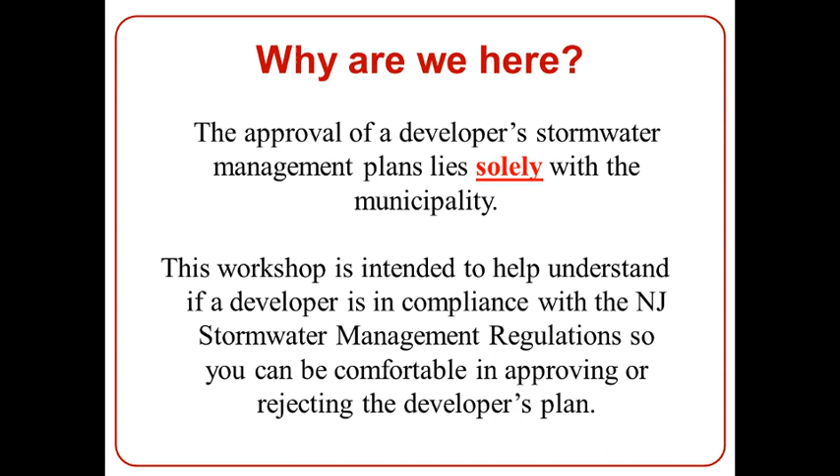Like I said, I'm with Rutgers Cooperative Extension. We've been around for about 100 years. Rutgers University is the land-grant college for the state of New Jersey. That's something that Abraham Lincoln created in the 1860s. They gave large chunks of land to universities across the country so they could better teach agricultural and mechanical arts. Rutgers competed against Princeton, and not only did we beat them in the first football game, we beat them out on this too and became the land-grant university.

About 20 years later, we realized that we did not know how to be better farmers, so we started the Agriculture Experiment Station so we can do research on how to be better farmers. And then around 1914, we realized most farmers don't go to college, they farm. So we formed the Cooperative Extension Service. The idea is to extend the knowledge university out to the people of the state.

We have an office in every county, and the idea is that you can go to the county office. If you were the farmer and had a bug on your potato, you can go to the county office, and that county agent would explain to you how to deal with that. If they didn't know, then they would come to the university, and we would do research and figure out how to deal with the problem. Now, over the years, we stopped growing corn and started growing houses, so now we're more of an urban suburban as well as agricultural cooperative extension service. So we serve all of New Jersey, not just the farmers.

I came to Rutgers about 17 years ago, and I started the Water Resources Program. Our mission is to identify and address community water resources issues using sustainable and practical science-based solutions. As you know, every mission statement must have as many buzzwords as possible in it, and that has them all.

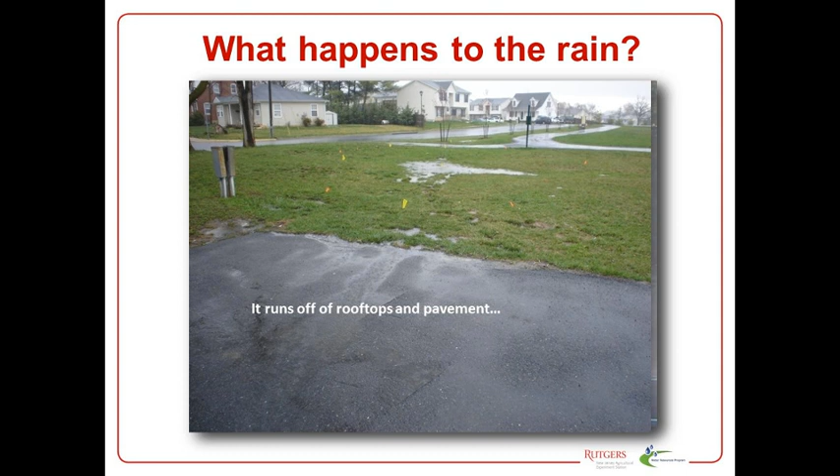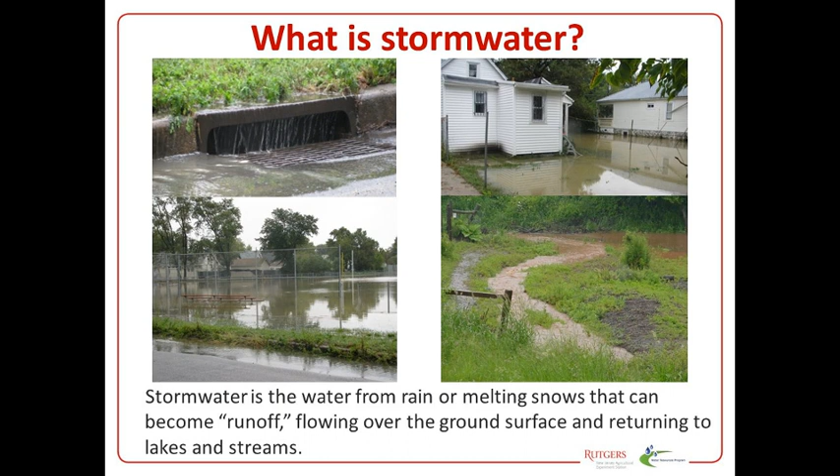Okay, so stormwater runoff, basically water from the rain or melting snow. So this is kind of what we're talking about here. That little stream on the lower right-hand corner is a little tributary by my house in Hillsborough. It's usually a little trickle of water, unless we get a little bit of rain, and then it becomes this muddy mess carrying water out to the Royce Brook. So these are things we're trying to avoid.

We talk a lot about the hydrologic cycle, the water cycle. Our kids learn this in 4th grade, about how water is cycled through this cycle. We can't create or destroy water, it's just there, transforming how it appears in our environment. We explain often to the kids that the water they're drinking is the same water the dinosaurs peed in millions of years ago, and kids tend to get a kick out of that.

But we've changed this water cycle. We've added lots of development. Under a natural, wooded, forested condition, we get about 10% stormwater runoff. As we add single-family homes, 1-2 acre lots, we get about 20% runoff. As we add more dense development, quarter-acre, half-acre lots, we get 30% stormwater runoff. And then when we get downtown New Brunswick or some of our bigger cities, we get about 55% runoff.

New Jersey gets on average about 44, 45 inches of rain a year. The climate is changing, that's real, it's not a myth. And that number is expected to go up to 48 to maybe 50 inches a year as climate continues to change. So we will get more water in New Jersey.

So as we add more impervious surfaces, we get more stormwater runoff. An impervious surface is any surface that water won't pass through: roof of a building, a roadway, parking lot, sidewalks, even the very compacted lawns that we see in some of the retirement communities along the Jersey Shore. Although it looks like grass, it's so compacted water can't get through there, so they effectively become impervious surfaces.

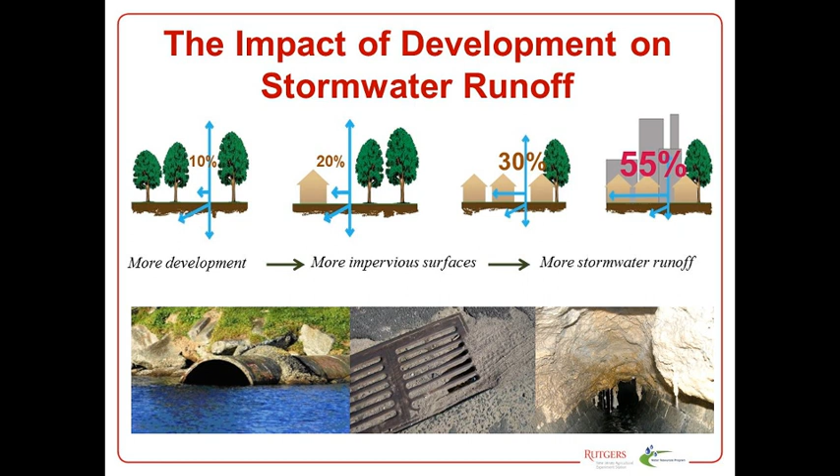So this becomes things that we really worry about. Impervious surfaces provide areas for pollutants to accumulate. When it rains, it carries this pollution off.

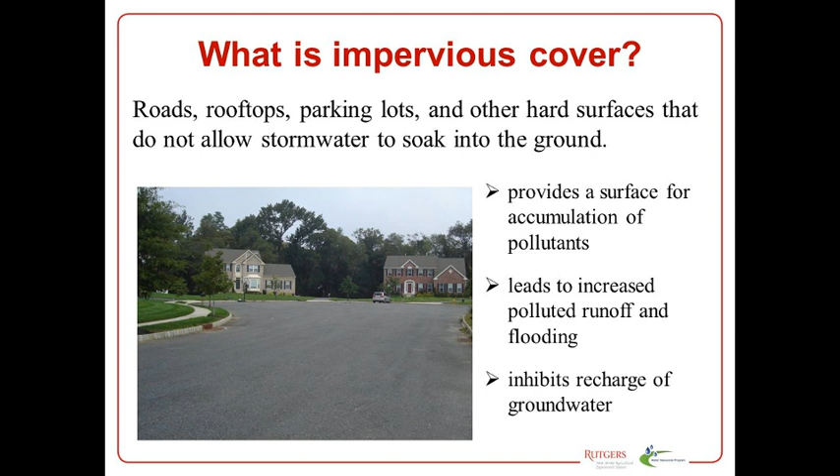Also, very importantly, it inhibits groundwater recharge. About 50% of the water we use in this state comes from the ground, so we're trying to get water back in the ground. If we don't, we don't have water to irrigate our crops, we don't have water to drink, and we don't have water to feed our streams in the summer months when it gets hot and we don't get a lot of rain. So that's very important to think about.

As we change our landscape, we add more impervious cover. So these are some of the things we see: more stormwater runoff volumes, higher peak flows, a lot more non-point source pollution, which is pollution that runs off the land, and less groundwater recharge. These are things we're trying to avoid.

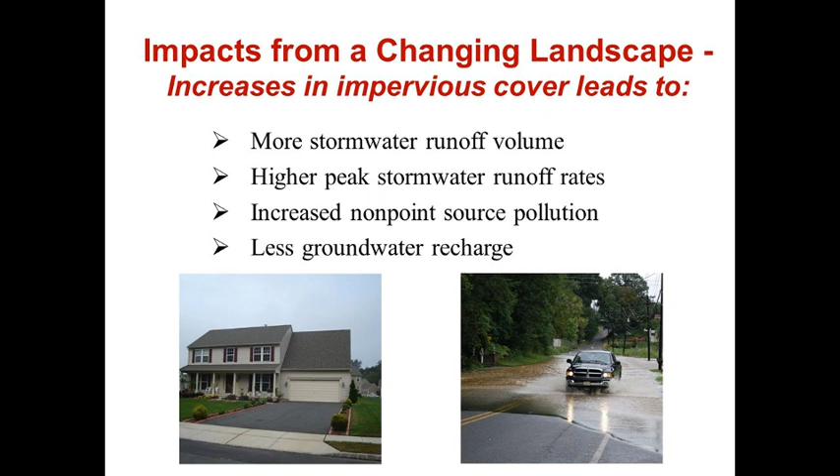By adding those impervious surfaces, we've created a new water cycle, an urban water cycle. We get much less infiltration and much more stormwater runoff. Now we're trying to figure out through stormwater management how we can reduce that runoff and get more infiltration into the ground. That's a lot of what our stormwater regulations are written about.

The current regulations were passed in 2004. There are new regulations expected to come out after the new year. They have the same requirements; the only difference is how we're going to manage stormwater. They're going to require more green infrastructure to be used to manage stormwater. So things aren't going to change all that much except for the practices put in place to manage the stormwater runoff.

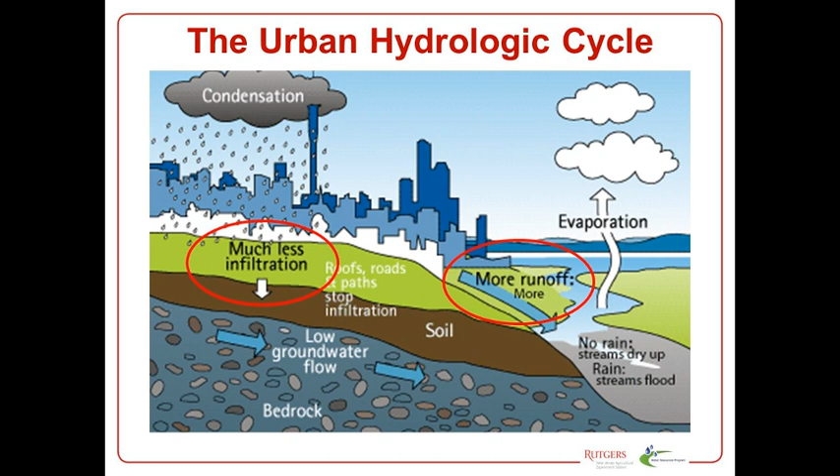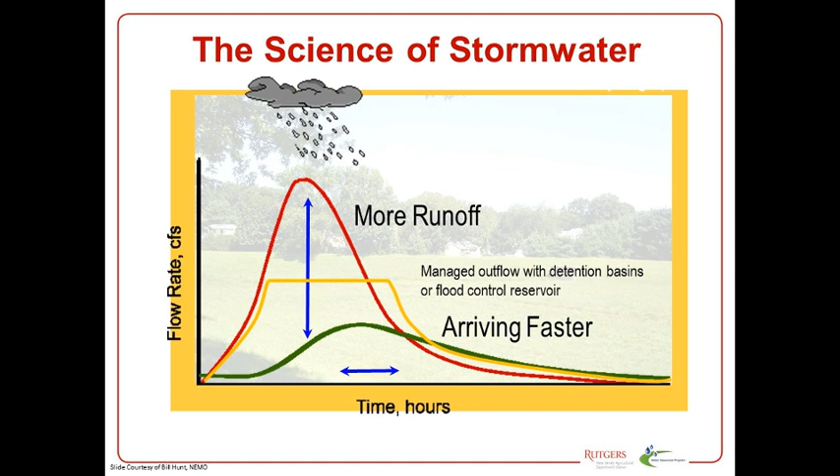Okay, so I think we're okay, right? So, history of stormwater management—this is my favorite part of this talk.

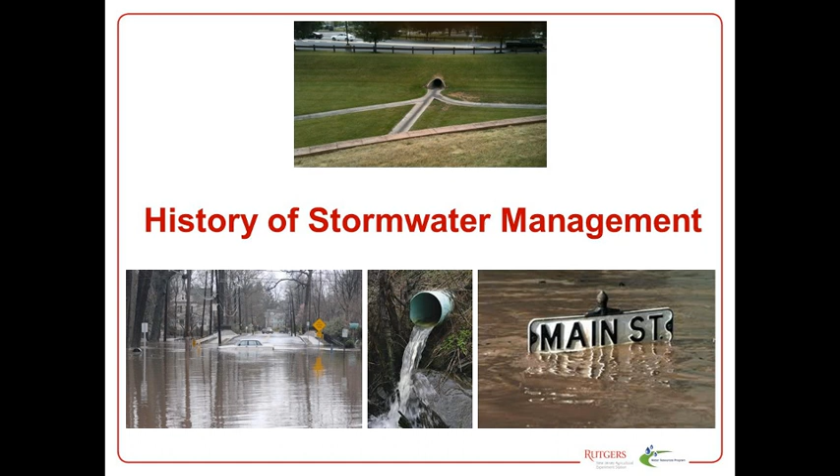The bottom right photo, Main Street, that's Manville, New Jersey, during one of the nor'easters that we have. That sign is really about 9 feet high—people kid me that it's 2 feet off the ground, but it's really not. The bridge on the left side is constantly flooded. It doesn't take much water to flood those bridges out—2 or 3 inches of rain and you see cars floating away. It's not unusual in New Jersey, okay?

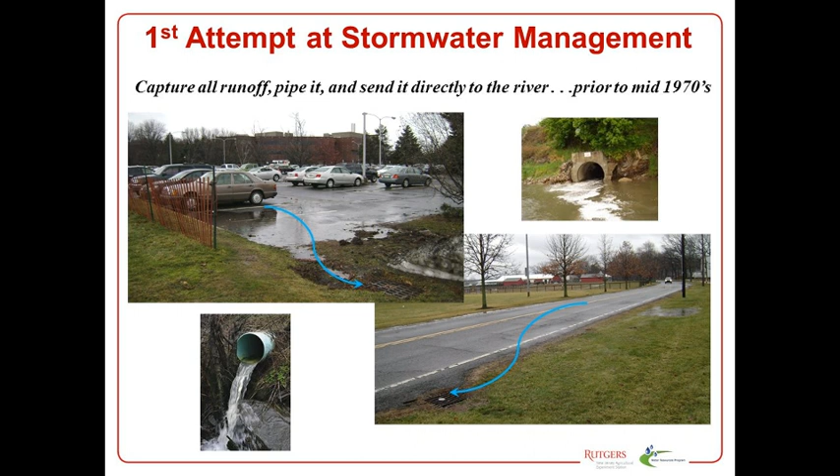So the first attempt at stormwater management was to grab the water and throw it in the catch basin and pipe it into the river directly. There's no storage, no holding it back—let's hurry it downstream and let the next town downstream worry about it. So if you're in Hillsborough or Montgomery Township in Somerset County, we let Manville worry about it, or Bound Brook. This was the original concept: hurry up and get it away, taking into no account what our downstream neighbor might be experiencing because of our stormwater runoff and how we manage it. So that's part of the issue.

The second iteration, we decided to create these big, beautiful detention basins. The idea with the detention basin was to grab all the stormwater runoff, hold it, and let it out slowly. So we took a 50-acre farm or 50-acre woodland and put houses on it with lots of pavement and rooftops. We increased the amount of stormwater running off that area, and then put it in the basin and let it out slowly. The basin does not infiltrate stormwater—most of these basins are very compacted, so very little water gets infiltrated. It just holds the water and lets it out slowly to prevent that peak from flooding downstream.

Most of these basins are designed for the 100-year storm, which is about 8 inches of rain over 24 hours. The 100-year storm does not come once every 100 years—the chance of getting it this year is 1 in 100. It's more of a probability thing. This is why we get the 100-year storm every few years, because we're just a very unlucky state, I guess.

The idea with these basins was to hold the water and let it out slowly. Somebody started worrying about mosquitoes, and they said if we have standing water for more than 72 hours, mosquitoes breed and we'll have serious health effects.

So somebody decided we're going to put in concrete low flow channels. The bottom of this basin is graded at about 0.5%. It's very hard to grade soil at 0.5%, but New Jersey is the concrete king of the world, and we can pour concrete at 0.5% all day long. So we pour these little concrete low flow channels in there.

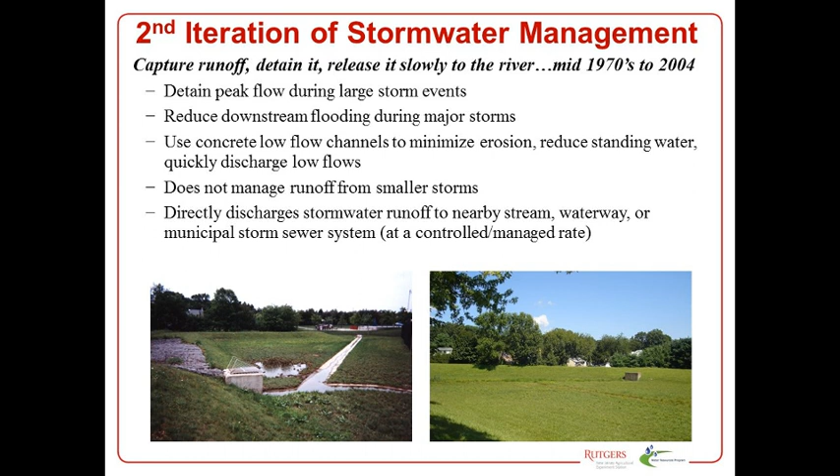So these became a big issue in New Jersey, and a lot of towns are trying to get rid of these right now. So the third iteration came out in 2004.

Regulations came out - two sets of regulations. There was a stormwater permitting regulation and a stormwater management regulation. The stormwater permitting regulations are often referred to as the Phase 2 regulations, or also the MS4 permit. The 4 S's: M stands for municipal, separate storm sewer system. That's the 4 S's.

So the idea is that every town in New Jersey, all 565 towns, have a permit for their stormwater system - the piping in the road, the ditches on the side of the road, anything that moves stormwater around their town. These are the permits that require you to do street sweeping, clean out your catch basins, adopt a pet waste ordinance, and adopt a don't-feed-wildlife ordinance.

The other thing that was passed was stormwater management regulations. The idea was that we were required to manage stormwater from any major development. Major development was defined as any development that disturbs more than 1 acre or adds a quarter acre of impervious cover. The idea was to reduce flood damage, reduce soil erosion, and protect the public.

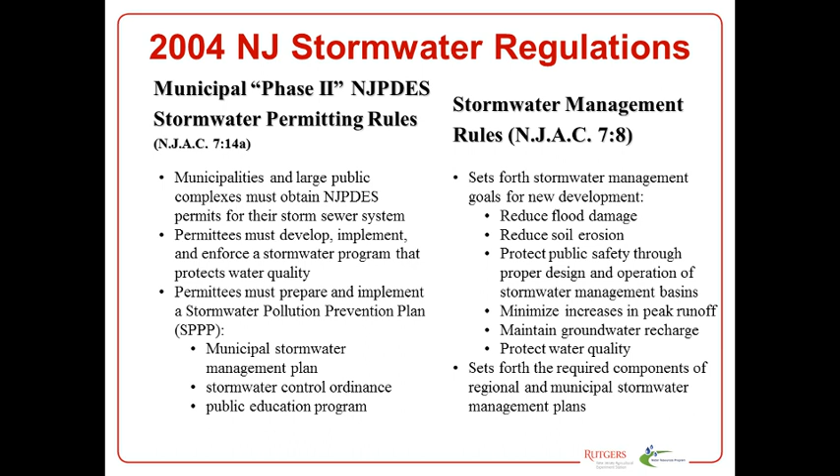It's still disturbing 1 acre or adding a quarter acre of impervious cover. You're still required to do all the things required in the earlier regulations. The 2020 regulations just ask you to do it a little differently, mainly with green infrastructure, and we'll talk more about that in a minute or two.

So the third generation, this is the one that came out in 2004. Not only are you required to manage these peak flows, but you're required to maintain groundwater recharge and reduce pollution to our local waterways. The idea was you're required to maintain 100% of your annual average groundwater recharge.

So if you had a 50-acre piece of wooded land that was recharging 1 million gallons of stormwater a year, after you put up all your townhouses, it needs to still be recharging 1 million gallons of stormwater a year. It also requires you to remove 80% of the sediment, the total suspended solids - any runoff off the property has to be filtered so no sediment leaves the property. So those were the two additions to regulation.

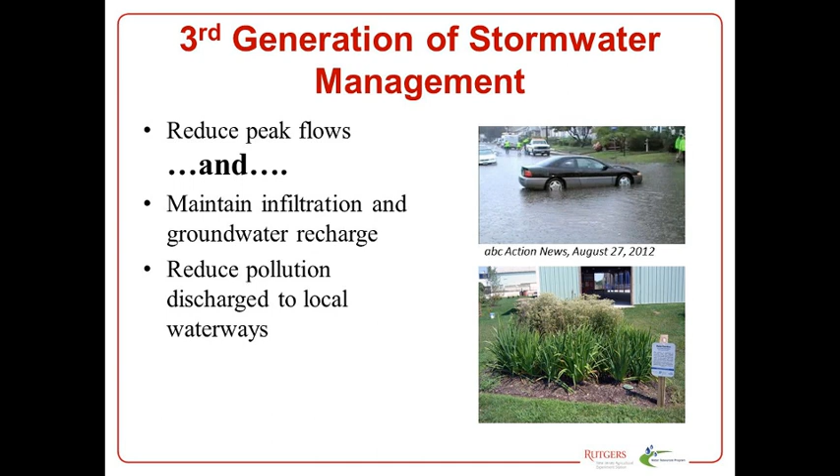So not only dealing with water quantity, but dealing with water quality and groundwater recharge. So how do we do that? Well, we have a video here that kind of shows that - this is a video from the American Society of Landscape Architects. Hopefully I'll be able to get it to work. Let's see how this works here.

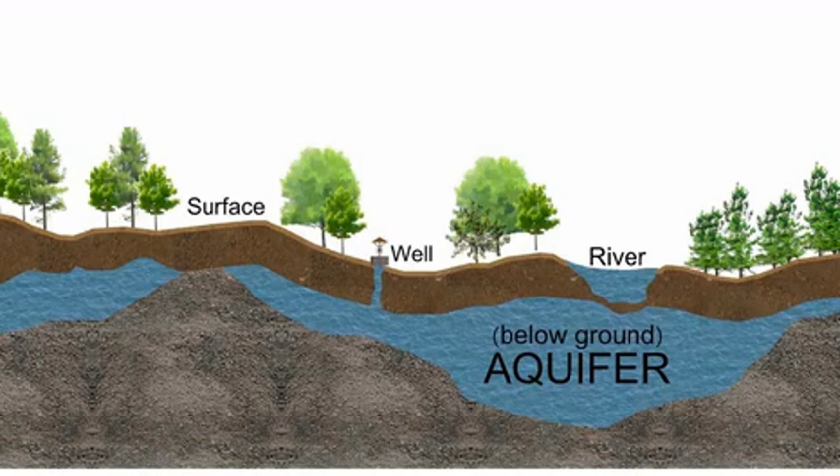Landscape architects design ways to divert and collect rainwater to prevent damage and replenish the aquifer, a below-ground natural reservoir of water used for drinking, cooking, bathing, and irrigation. This animation demonstrates how rainwater is managed on a university campus plaza.

The plaza surface is composed of standard materials. Concrete defines the walks and steps, and sod and lawn make up the open space. The building's roof, which also collects and discharges water, is a plain solid surface. Storm sewer and drains are ready to catch and pipe water away from the site and prevent flooding.

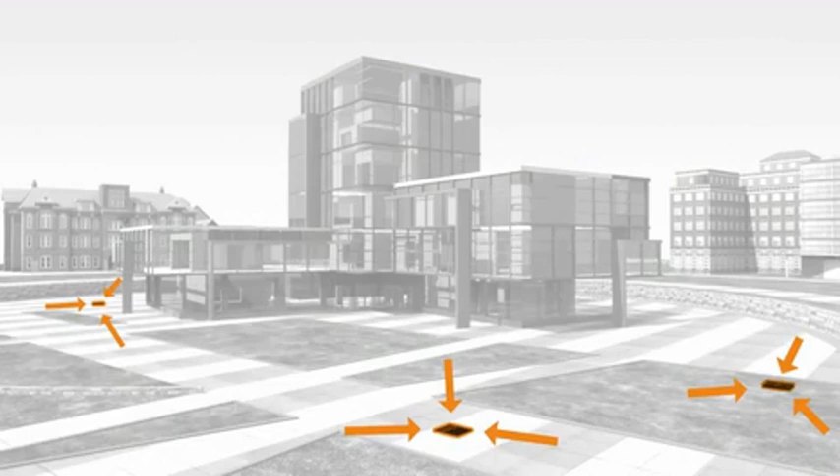During heavy rainfall, these materials, like concrete and sod, can only absorb so much water. The excess rainwater on the surface is funneled into the storm sewers. The building's roof diverts most of its water down pipes into storm drains as well. All this excess water, called runoff, can overtax and cause the storm drains to back up.

This causes water to collect in ever-expanding pools. Too much runoff due to heavy rains can cause damage and sometimes catastrophic floods. It also results in more polluted, untreated water entering the aquifer.

There are more effective means to manage stormwater using sustainable systems and materials that prevent flooding and replenish the aquifer. The first system is a green roof placed on top of a building. It is layered with drainage materials, compost or planting soils, and vegetation, and can absorb some of the rainfall, reducing the amount of water flowing into the storm drains.

Another system involves porous pavement. Concrete surfaces are replaced with individual concrete bricks called pavers. Each paver is interlocked with its neighbor and separated by permeable material, composed of small crushed rocks, also called aggregates.

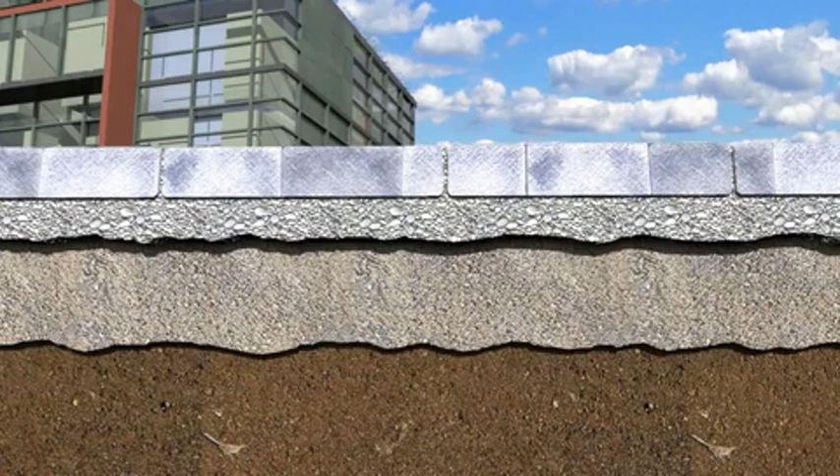Zooming into the cross-section, we see the permeable aggregates between and below the pavers. This aggregate-filled space acts as a sponge, absorbing water downward, diverting a good amount of runoff from the storm drains. The diverted water will eventually make its way into the aquifer below ground.

The third system is called bioretention, also known as a rain garden. A rain garden is a swale or channel that absorbs, holds, and slowly releases excess water. Its section is composed of compacted soils defining the depth, width, and slope of the swale, sand and drainage materials, plant soils, and vegetation native to the region. Rain gardens are not only aesthetically pleasing, they also restore wildlife habitat.

Now when it rains, water does not collect into large pools. Instead, our three systems absorb and redirect the excess runoff. The green roof prevents a lot of water from entering the storm system or hitting the ground. The porous concrete pavers absorb some of the rainwater and direct it downward into the aquifer. And the rain garden accumulates the remainder of the rainwater, preventing flooding and damage.

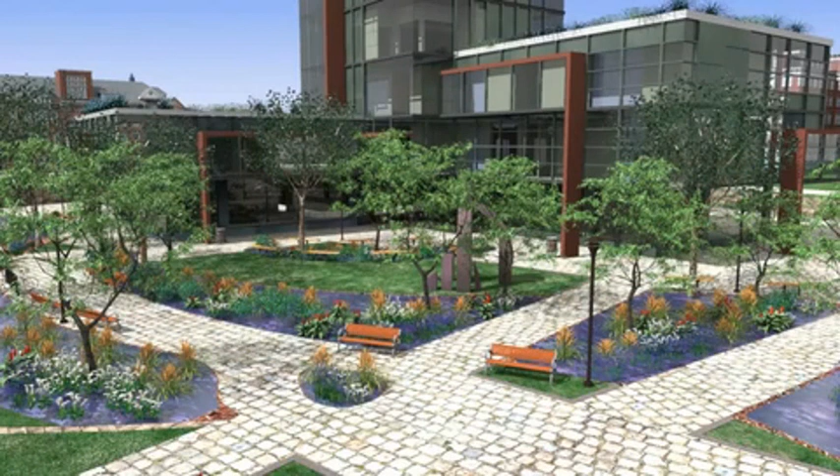As part of its function, the rain garden slowly releases rainwater into the aquifer over a 24-hour period. Just as important, the vegetation acts as a natural water purifier, absorbing pollutants and toxins from the water.

Water is in high demand and shortages are common. These three systems are able to capture and treat more water than typical stormwater mechanisms. The systems are effective, easy to implement, and contribute to a more sustainable water management practice.

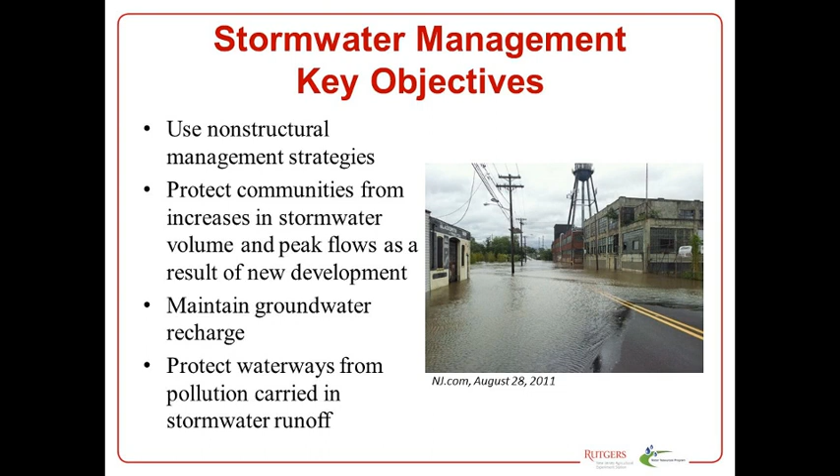So the stormwater management objectives, there were really kind of 4 objectives with this. One was using these non-structural management strategies, thinking about how to better manage the water without actually having to build too many things. Protecting communities from increases in stormwater, so this is really kind of flooding issues, maintaining groundwater recharge, and also filtering out pollution. That's really the other component of the regulations.

And none of that has changed with the 2020 requirements. This talks about major development. We discussed this earlier: disturbing 1 acre or more, or increasing impervious area by 1/4 acre. If you do that, then you have to comply with these regulations.

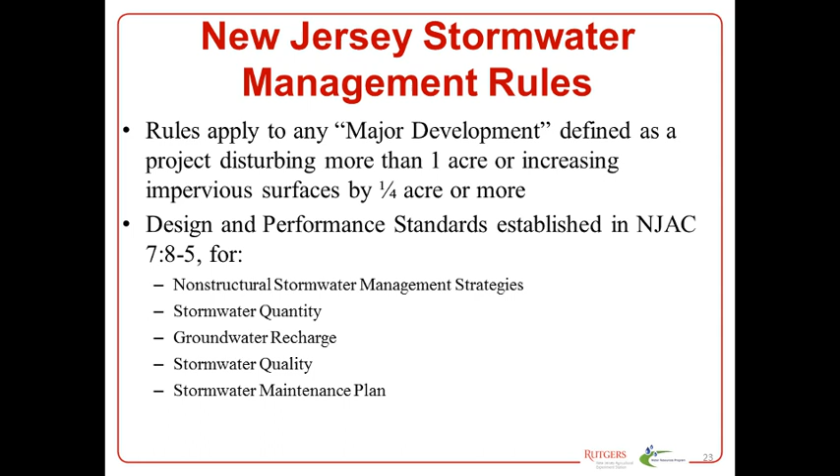And you'll notice, once again, non-structural strategies, quantity, recharge, and quality. And the other bullet here is a stormwater maintenance plan. Anything that you build to manage stormwater, you have to provide a maintenance plan for, so that whoever owns and operates that facility knows how to take care of it and make sure it's being properly maintained. We know that if things aren't maintained, they tend to stop functioning in every walk of life.

Non-structural strategies are often referred to as low-impact development principles. The idea is to collect and infiltrate stormwater near its source. This second bullet is the main focus of the 2020 regulations: how do we disperse stormwater practices throughout the development so we can collect the water and infiltrate it as close to the source of stormwater as possible? So you're talking about smaller systems that are managing smaller amounts of water.

Somebody wants to know, is there a concern in parking lots that allow infiltration that pollutants will be conveyed into the groundwater table? That is a concern at times. Typical parking lots where cars are parked, usually not too much of a problem. Even if the cars are leaking a little bit of oil, usually that's not an issue. We tend not to promote infiltration off of very dirty places, like where they keep the school buses, or where the public works department keeps their trucks - any older vehicles that might be leaking fluids, or heavy use vehicles. We do not encourage infiltration from those places. Actually, it's not allowed in the regulations to infiltrate from those places. So, for example, you're not allowed to infiltrate from a gas station. That's another aspect of it.

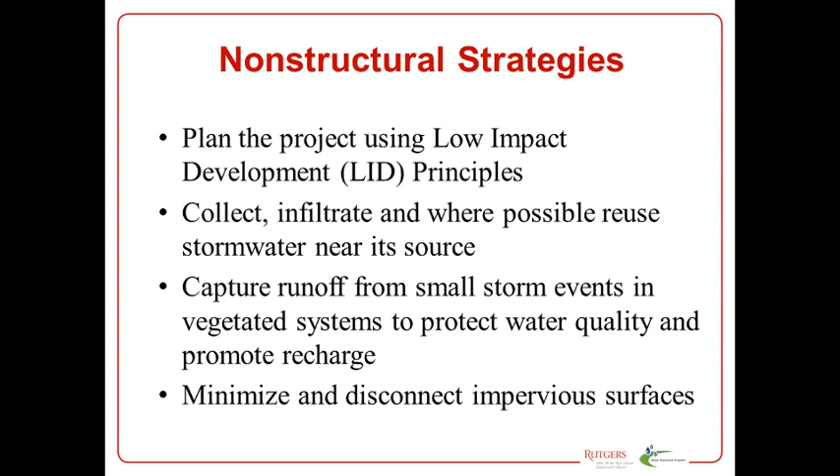Capturing runoff from small events is another issue, using vegetative practices to do that, and minimizing and disconnecting impervious surfaces. We'll talk more about disconnection - it's a very powerful tool that we don't use enough of in New Jersey.

So water quantity regulations - these have not changed. These have been the regulations since 2004. The idea is we're going to control the post-development runoff for the 2, the 10, and 100-year storm events. In other words, we calculate how much stormwater runs off before we develop. For the 2-year event, that's about 3.3 inches of rain over 24 hours. A 10-year event is about 5 inches of rain over 24 hours, and the 100-year event is about 8 inches of rain over 24 hours. That varies depending on what county you're in, so there's a range. You can see there are some numbers on the bottom about the 2, the 10, and the 100-year rainfall events. So the idea is that you measure, you calculate what's coming off the land now, and you try to reduce that after you develop.

The third bullet on this list, design BMPs. Now, BMP stands for Best Management Practice. That's something that we use all the time - we talk about these stormwater measures.

So the BMPs for the 2, 10, and 100-year storm talk about reducing the peak flow. For the 2-year storm, it's a 50% reduction. The 10-year storm is a 75% reduction of the peak. And for the 100-year storm, it's 80% of the peak. So for the 100-year storm, if 100 cubic feet per second is your peak flow off the land, after you develop, it can only be 80 cubic feet per second. So you really have to do a good job of managing this.

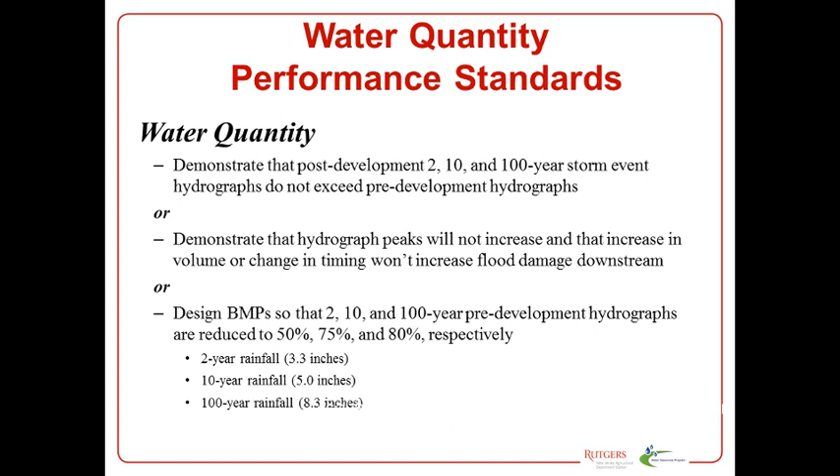There's a lot of questions about green roofs that we'll get into a little bit later as we go on.

So the groundwater standard is to maintain 100% of your average annual groundwater recharge. This is pretty simple: if you're recharging 1 million gallons of stormwater before development, afterward you need to be recharging 1 million gallons of stormwater. The second requirement talks about the 2-year storm, measuring pre-development versus post-development peak. Usually the second calculation gives you a larger volume of stormwater to recharge, so most people who do these calculations use that first requirement, maintaining 100% of their average annual groundwater recharge.

There's a question about whether the developer is held to reduce the peak flow or simply not exceed pre-development levels. No, they are required to reduce the peak flow. For the 2-year storm, the post-development peak has to be 50% of the pre-development peak. For the 10-year, it has to be 75% of the pre-development peak, and for the 100-year, it has to be 80% of the pre-development peak. So you are reducing it. You have to keep in mind, you're getting a lot more stormwater runoff after development because you're adding so much impervious cover.

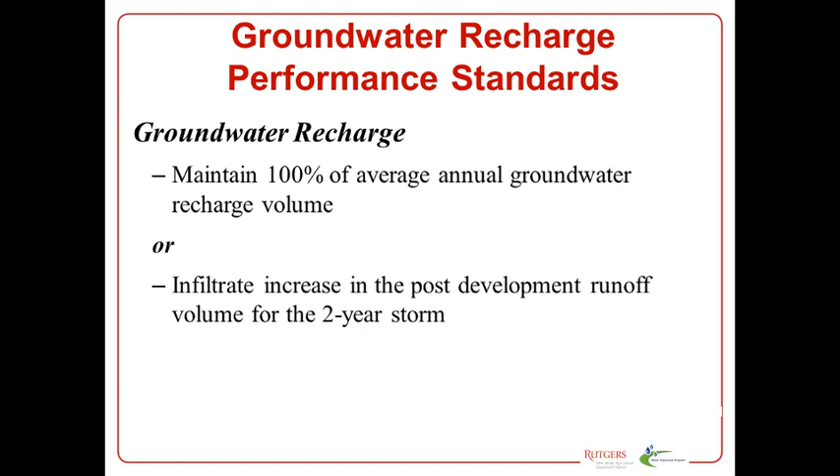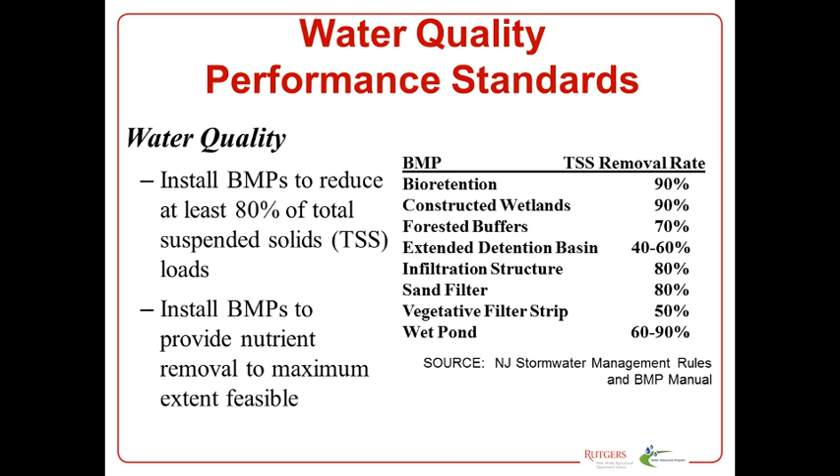A lot of people ask, what is the maximum extent feasible? Well, that depends who you are. If you're a developer, the maximum extent feasible may be a much lower number than if you're an environmentalist. So that's always been a question that we've had. That terminology comes from EPA, and it's been very difficult to get a real calculation of what that number should be.

We do have guidance for this: the Stormwater Management Manual, the BMP manual, and the Tier A Municipal Stormwater Guidance document. The Tier A is the permit for Tier A communities. There are 2 permits, MS4 permits, stormwater permits that towns have. Tier A is for the more developed towns, Tier B is for the rural towns. There are 99 Tier B towns. The rest of the 565 municipalities are Tier A municipalities that have to achieve much higher requirements of what they must do. The municipal stormwater management rules, or permitting rules, are the ones that require towns to pass a stormwater control ordinance and to manage stormwater from any new development or major development.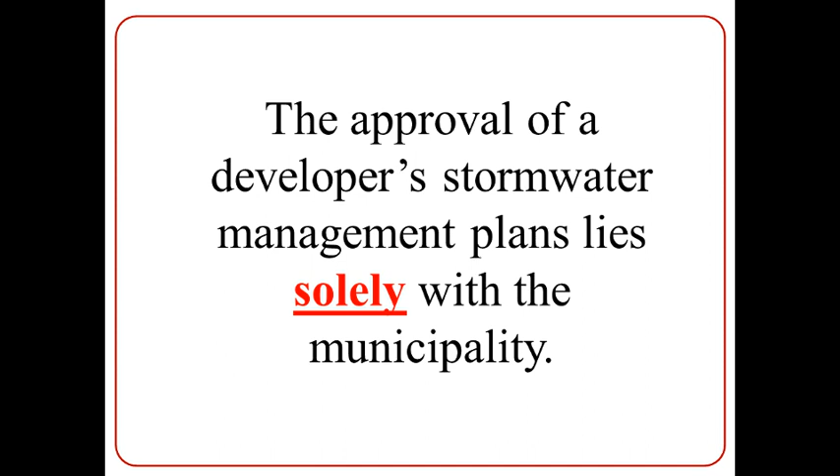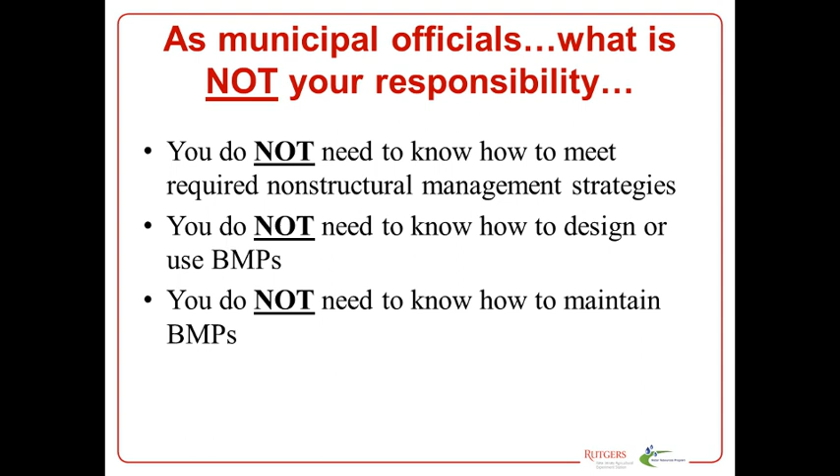So let's move on. As municipal officials, what is not your responsibility? You don't need to know how to meet the required non-structural strategies, how to design stormwater practices, or how to maintain a practice. But you do need to know that you're responsible for ensuring that all major developments are compliant with the regulations.

Originally, New Jersey DEP asked me to teach all of you how to be engineers. But most people go to college for 4 years to do that and have to practice for quite a while. It's a little silly trying to teach volunteers with a wide range of backgrounds how to be engineers. So the best we can do is teach you how to ask the right questions. That's what we're trying to accomplish here.

So if you allow development to go in and it doesn't comply with these regulations, the town is liable. We've seen this happen in one town where they let development go in, they weren't satisfying the groundwater recharge requirements, and the town had to come in and fix the system. The developer was long gone. Most developers develop a piece of property under a company name. After the property is developed, they get their bond back, dissolve the company, and start another company for the next development. So if a township approves a development that didn't comply with the regulations, it's hard to go back after the developer.

In this case, the town had to spend $250,000 to redesign the stormwater system, and a lot more money to actually reconstruct it. That was all taxpayer dollars, because they didn't make the developer follow the regulations. So the taxpayer got the burden of that, which is what we're trying to avoid.

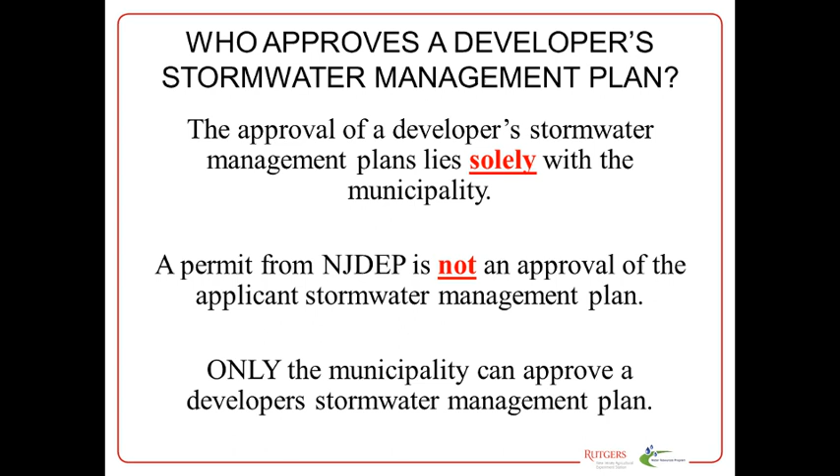You will often see an attorney come in for a developer, waving paperwork around, saying 'Look, I got my DEP permit, you don't need to look at my stormwater stuff.' That's incorrect. You still have to review their stormwater permit, their stormwater application, and their plans, and make sure it complies with the state regulations. If it doesn't, DEP won't be held liable. You as a town will be held liable.

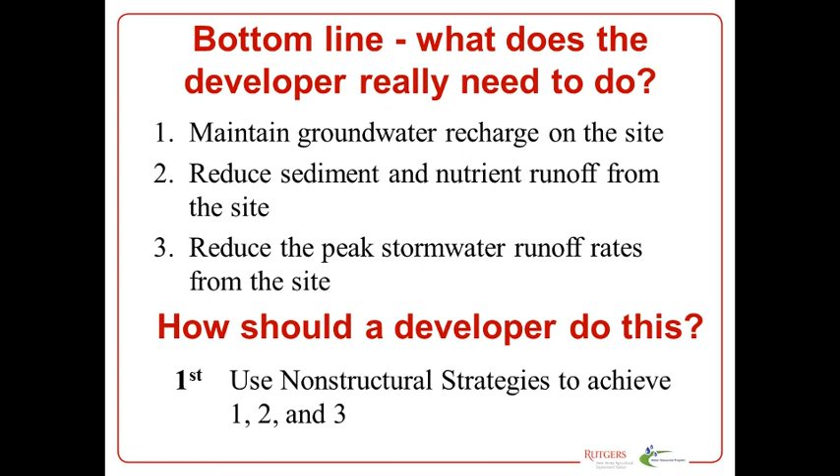So we start thinking about how to do this. The first way is to look at how a developer needs to approach this. First, we often look at maintaining our groundwater recharge, because in doing that, we can reduce our sediment or nutrient reductions and our peak flow reductions. The first step is to use non-structural strategies.

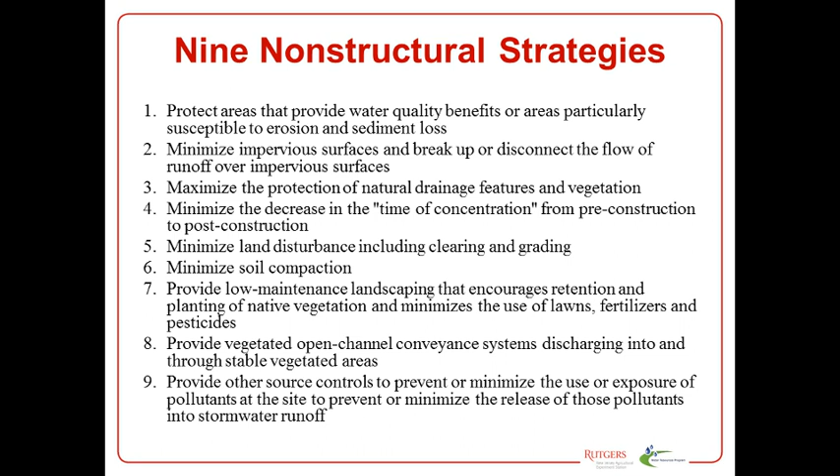This component is being replaced by the new stormwater regulations coming out in 2020. So these non-structural strategies are still in there, but the state is saying that by using green infrastructure, you're complying with these strategies, which some people agree with and others do not. But these are very straightforward things when you start thinking about them. We'll go through some of these pretty quickly so you can see what we're talking about.

We can break these 9 strategies down into 4 categories: vegetation and landscaping, maintaining or minimizing site disturbance, managing our impervious cover, and reducing or slowing down the runoff, reducing time of concentration. It's really about slowing down how quickly the water leaves your property. That's what number 4 is.

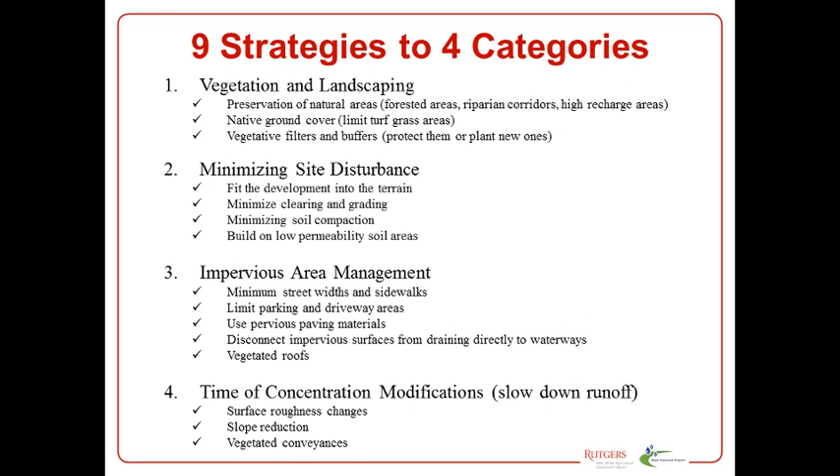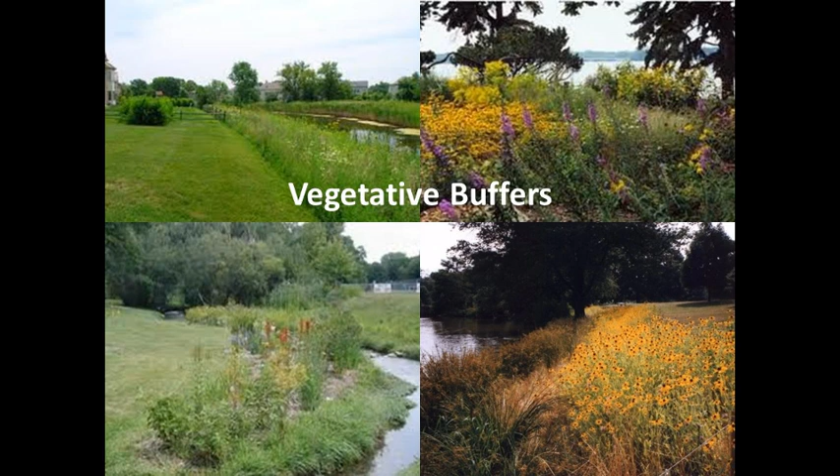So the first strategy is to protect areas that provide water quality benefits. We often see vegetative buffers around streams. We're trying to protect these areas, not disturb them, keep development out of them, which is very important. There are regulations that prevent you from developing within a certain proximity to the stream, depending on where you are in the state. Some are 300-foot buffers, some are less, but we do have required buffers around our streams.

Many of our houses have these concrete splash pans off of those downspouts, and water goes across that front lawn. That front lawn can absorb the first half-inch of rain, and that would really disconnect that rooftop from flowing directly to the stream. But in this case, you are directly connected because you're piping the water to the road, which directly goes to the catch basin.

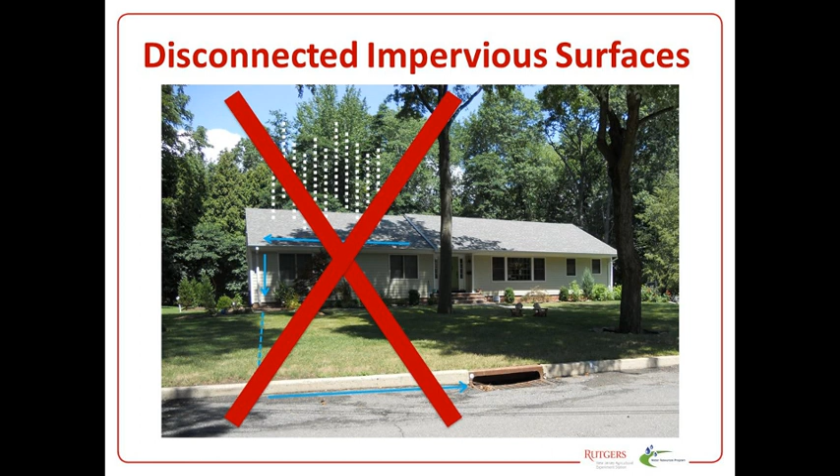One way to disconnect is to use a rain garden or bioretention system. The idea is the water can go into this landscape feature and slowly infiltrate into the ground. A rain garden is 3 to 6 inches deep with some ponding water. It can be designed to capture the first 3 to 4 inches of rain from that rooftop, whereas your lawn would only absorb maybe the first half-inch. So it's a much more robust system that does a much better job of managing stormwater.

So this is a great example from New Jersey DEP, out of the Best Management Practice Manual. We have 1 acre of pavement, 2 acres of grassed or pervious area, and we get 1.25 inches of rain. That 1.25 inches becomes very significant in the state — we call it our water quality storm. Presently, 90% of the storm events we get come in storms less than 1.25 inches.

Now, as climate continues to change, that number is going to go up. We've yet to get a number from our climate scientists — they're unwilling to say it's going to be 1.5, 1.75, but they know it's going to go up. So your 1.25 inches of rain hits the 1 acre of pavement, all runs off, goes to the road, goes to the inlet. That same rain hits the grassed area, and very little of it runs off — you get 28,500 gallons of stormwater runoff.

So as a municipality, the number one thing you're worried about is money, right? So how can we reduce this runoff by 85% for absolutely nothing, for free? You can't get any better than that unless I pay you to do it. So what if, instead of having the water run off the pavement, we have the water run onto the grass or pervious area? When it rains, water will sheet flow off of that pavement into the grass area.

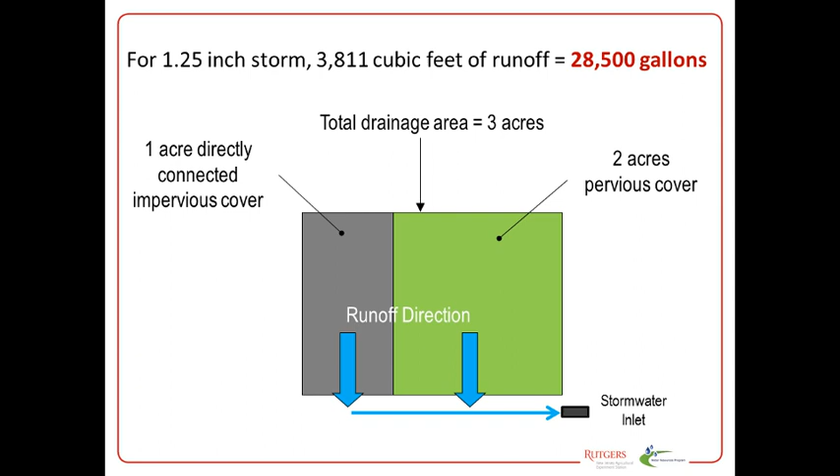So sheet flow — on a day like today, you're standing in a Walmart parking lot, watch how the water moves across the parking lot. It moves as a sheet of water about an inch thick. When that inch-thick sheet of water hits that grass, which is 2 or 3 inches high, it slows it down, it filters it out, it absorbs it, and that water has a chance to infiltrate into the ground.

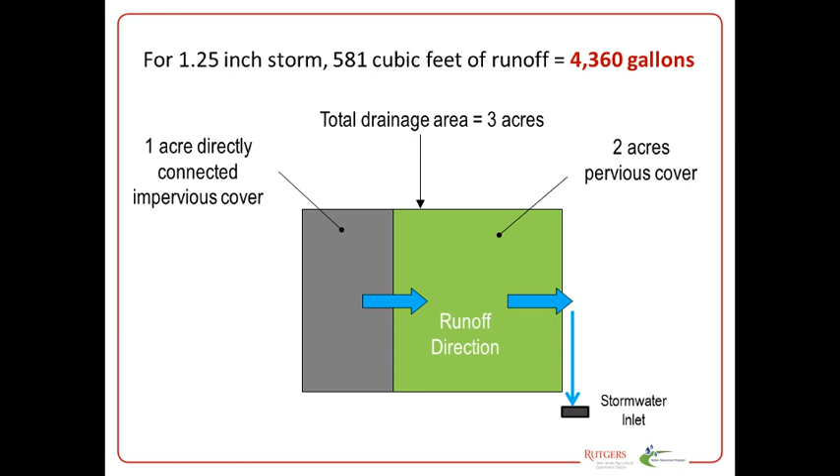So now you've gone from 28,500 gallons of stormwater runoff to 4,360 gallons. It cost you absolutely nothing — you had to pave it anyway, you just paved it a different way. You thought about it differently. You ran the water onto that pervious area, so you reduced that 1 acre parking lot to about 1/8 of an acre — an 85% reduction in runoff.

Now, if the design storm is a 10-year storm, that's 5 inches of rain, and that percent difference only drops to about 15%. That grass area cannot absorb 5 inches of rain from that parking area. But like I said before, 90% of rainfall events come in less than 1.25 inches. So 90% of the time we can make that 1 acre parking lot look like 1/8 of an acre, simply by changing how we pave it and where we send the water.

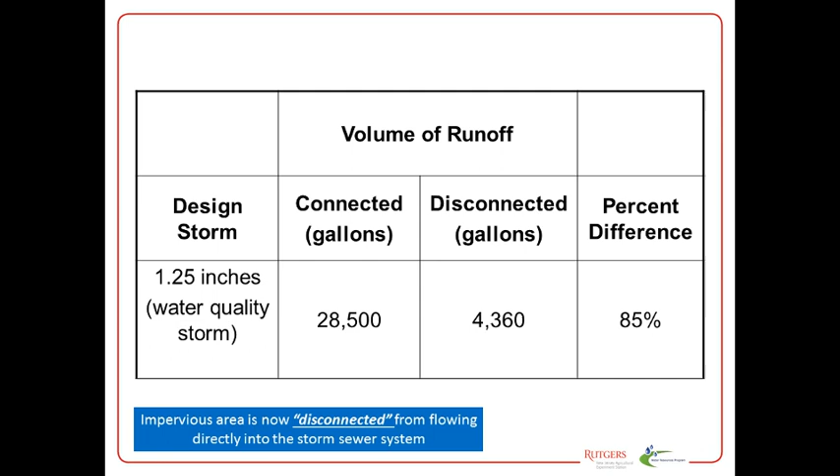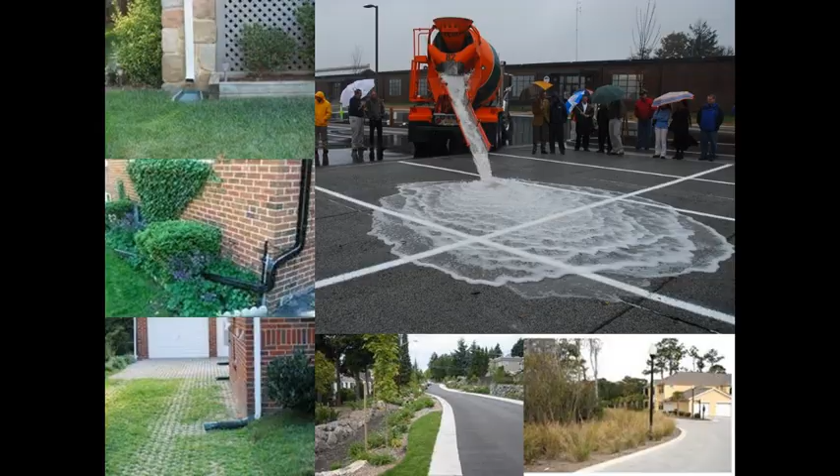In the upper left corner, this picture shows a downspout disconnection. In the next picture down, they're running the water into the vegetative area along the house. Here they're running it onto a driveway that has grass and what we call grass pavers.

In this spot, we can see this is the EPA in Edison. They have porous asphalt there, pervious concrete, and they do a lot of testing there just to show how it works. So these are ways that we can change the pavement we use and disconnect these impervious surfaces.

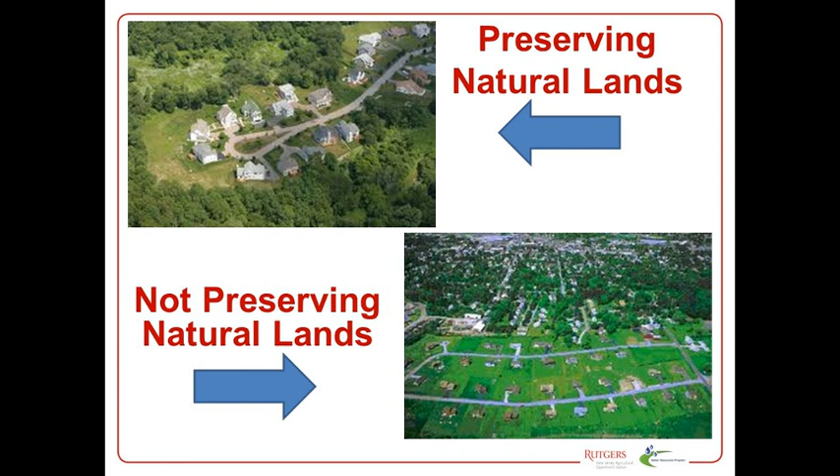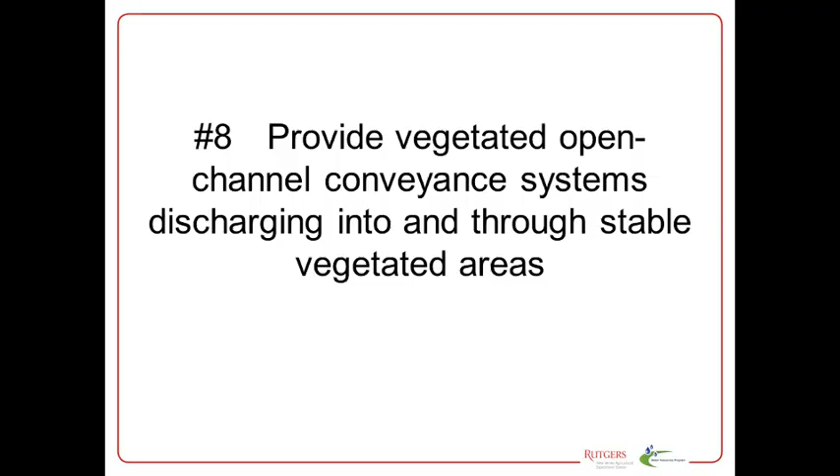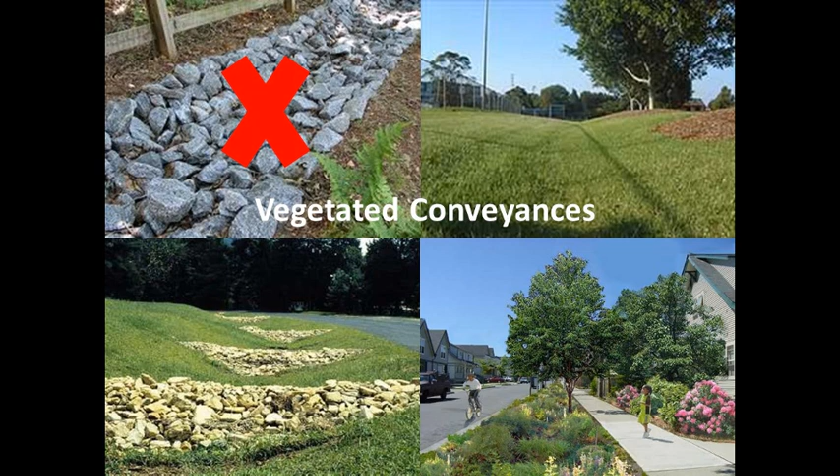Well, not really - you can put stone check dams in and the water will build up behind the dam and overflow into the next area. It's a way to slow the water down to prevent erosion. What we don't like is the upper left corner with all the riprap. It really does not help infiltration. It may stabilize that channel, but it's expensive and probably unnecessary because that's not a very steep area.

So there's a checklist you can use to see if they've actually looked at these non-structural strategies. This is something we encourage towns to make sure they use. It's contained in the Best Management Practice Manual by DEP.

So the other thing we had done was we started talking about asking the right questions. So we have in here these checklists, and these are the questions that, if you answer no to any of these, then you're really not in compliance with the regulations.

The way this was set up, and we worked on this with New Jersey DEP quite extensively, was that as you're going through these questions, if somebody says no, we're not telling them they can't develop. They have to go back and fix their development plan. We never tell people not to develop, that's not our job. Our job is to make sure they develop in an environmentally conscious way and follow the regulations.

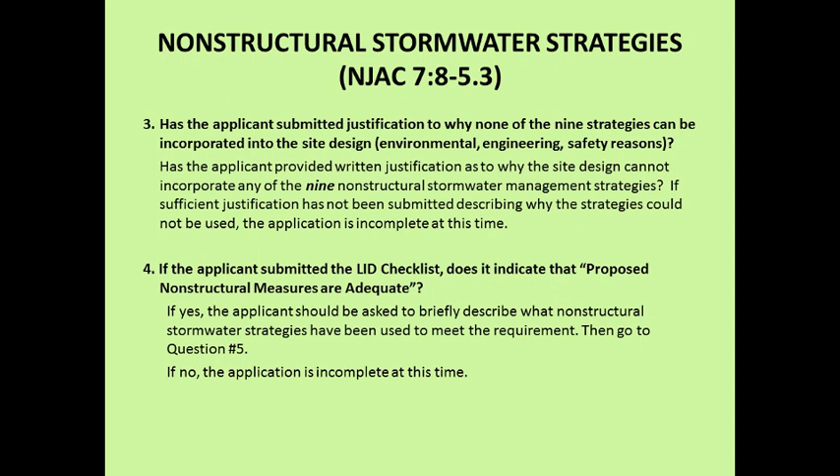So you can see some of these questions in here. A lot of it pertains to the low impact development checklist I showed you, trying to make sure that all these folks comply with these 9 non-structural strategies. A lot of times we were printing these out, giving these to towns, and towns would post these on their website or use them as part of the development package.

So in this case, what they want to make sure is that if you're saying this piece of land is set aside to manage stormwater, then you have to deed restrict it. That prevents the next property owner from coming in and eliminating that piece of land. So if you have a rain garden in front of your property and development is considering that rain garden as managing stormwater from that property, it needs to be written in the deed that that land must always stay as a rain garden.

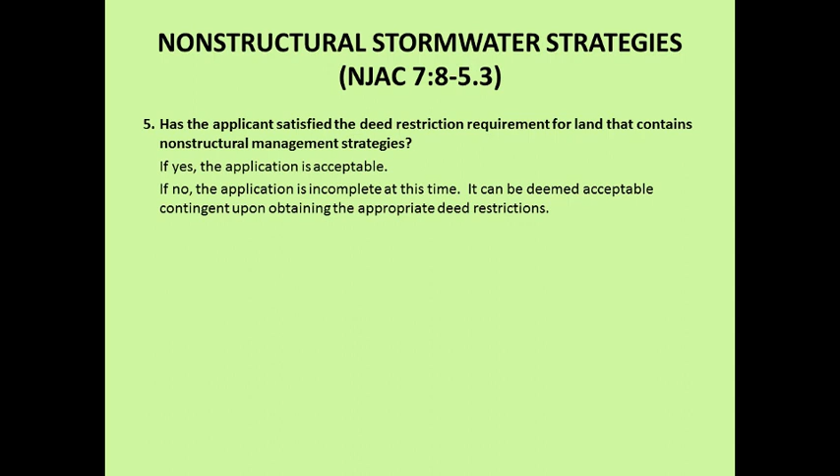And cost is not a reason for noncompliance. You didn't see that in here anywhere. The only reason to not use non-structural strategies... you can see on the bottom, the only acceptable reason for no is engineering, environmental, and/or safety reasons. Cost is not a reason. It's too expensive to do that is not a reason.

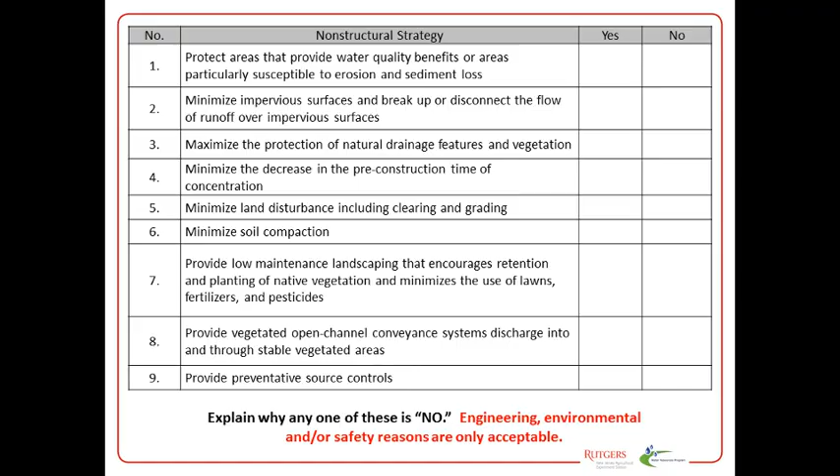So engineering - it won't work, it's too steep, we can't put a grass waterway in there, even with check dams it won't work. Environmental - it's going to cause more issues than it's going to protect. Or safety - a lot of people don't want deep ditches in their backyard where kids might be playing, so that might be a reason to pipe that area instead of putting in a grass waterway. These are things we think about, and a lot of developers say it's too expensive, and I'm sorry, but you've got to take that out of your profits. That's just the way it is, it's the regulations.

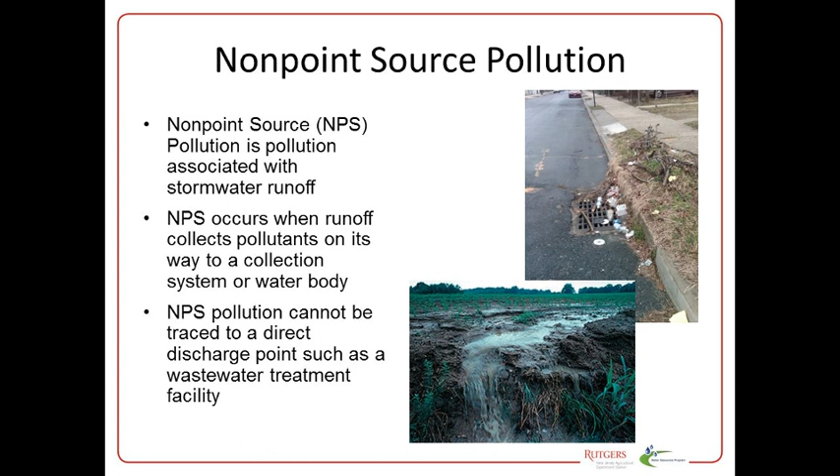So next thing we do is focus on incorporating systems to address water quality and groundwater recharge. We think about non-point source pollution that washes off the land. Nobody's running around New Jersey breaking thermometers in our lakes - the reason we have high mercury in our waterways is a lot of that settles from the atmosphere because we happen to be downwind of Ohio where they burn coal, and metals are released into the atmosphere and settle out on our rooftops and pavement, then get washed into our waterways. These are areas where pollutants accumulate, and we need to protect them.

Lots of non-point source pollution: oil and grease from cars, petroleum hydrocarbons. That's the number one reason we can't dredge a lot of our waterways, because the concentration in the sediment in the lake is so high that the dredged sediments would have to be disposed of as hazardous material, and that's very expensive. Fertilizer, we put that on our lawn to make our grass grow.

When fertilizer gets into the streams and lakes, it makes the algae grow. Algae is a plant, so during the day, when the sunlight's out, algae through photosynthesis takes in CO2 and pumps oxygen into your lake. At night, the algae respire and take in oxygen, and your oxygen starts to dip down. When the algae die, microbes come in to decompose them, and oxygen dips even further because those microbes use it during decomposition. The trick is, too, the warmer the water is, the less oxygen it holds.

So it's not unusual for you to have 2 or 3 weeks of very dry weather, wake up in the morning, look out to your lake, and see all the fish floating on the surface because the dissolved oxygen dipped below 1 part per million.

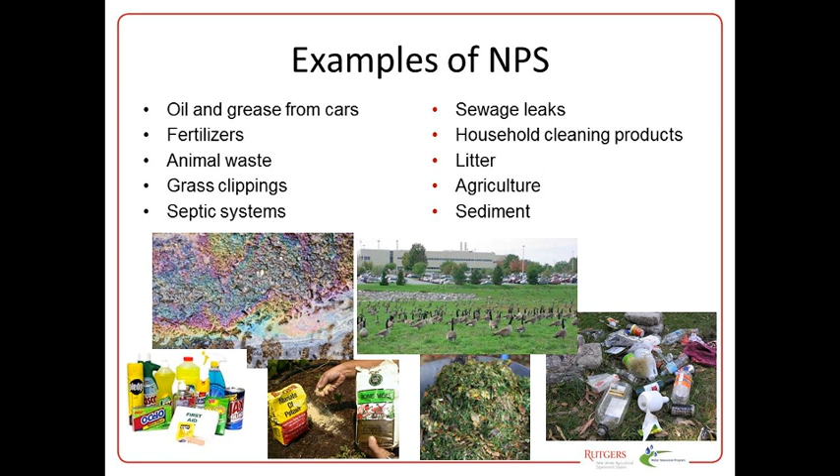Okay, so those are things we think about when considering impacts of non-point source pollution on fish and wildlife, and recreation. We can see this summer we had these harmful algal blooms.

So a lot of nutrients have gotten into these waterways, causing the algae to grow, and lakes are closed for recreation. Property values drop.

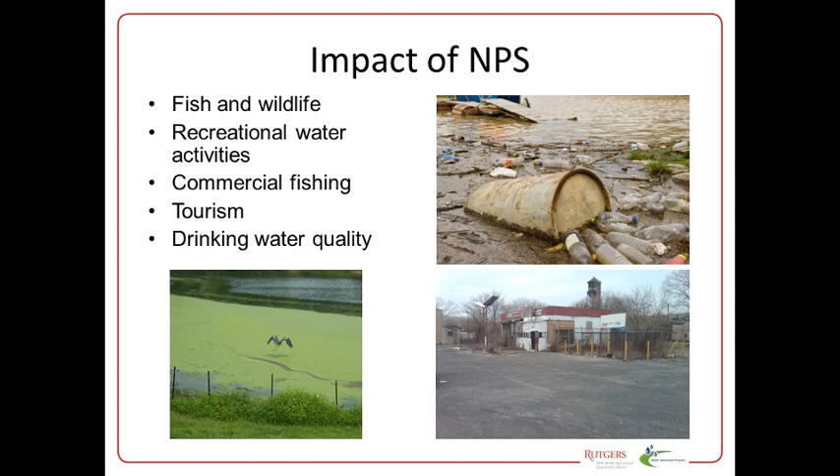Economic distress sets in where restaurants are on lakes, so we can see that happening. Years ago, when we had trash washing up on the Jersey Shore, the same thing happened, right? A lot of tourism, a lot of economic impact is associated with unclean waterways, so we have to worry about that aspect of it.

So groundwater recharge is another piece. It requires healthy soils, right? Permeability and hydraulic conductivity are really the same thing - it's how fast water moves into the ground.

Water has to infiltrate at least a half inch per hour for you to be able to put in a system designed to infiltrate stormwater into the ground. It can't infiltrate faster than 10 inches per hour, because the water moves into the ground too quickly.

There needs to be a vertical separation between the seasonal high water table, or the groundwater table, and the bottom of your infiltration system. You have to keep it away from basements, foundations, and septic systems. You don't want to be infiltrating stormwater right next to your house and having it go into your basement - that could be an issue.

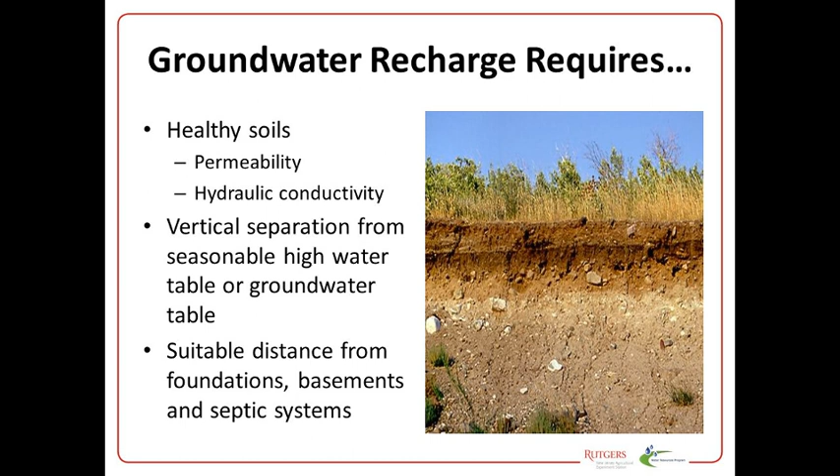So we try to keep any kind of rain garden infiltration system at least 10 feet away from a house with a foundation. Here's a little sketch of groundwater recharge - you can see it's away from the basement of the house, it's a safe distance, and it's above the seasonal high water table.

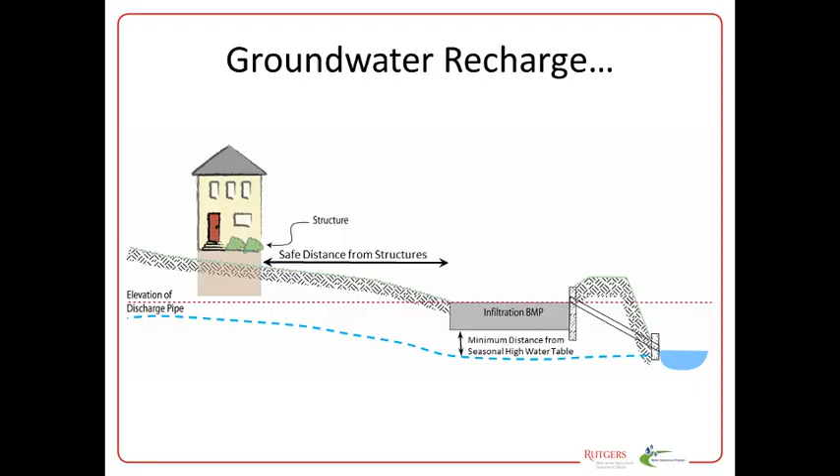So you have a minimum of 2 feet beneath the infiltration system and the water table, so the water has a place to go. If water doesn't have a place to go, that infiltration best management practice becomes a swamp, and that breeds mosquitoes and doesn't function the way it's been designed to function. So the number one system we'll see as we move forward with the 2020 regulations will be bioretention systems.

So a bioretention system - bio means life, retention means a system that holds water. They're designed to capture water and slowly infiltrate it into the ground. The vegetation helps take up some of the nutrients.

There's usually a mulch layer in there that allows microbes to decompose some of the pollutants. And as water moves into the soil, pollutants adhere to the soil and also get degraded over time. You can see the picture in the upper left-hand corner - it's one of my favorite pictures.

It's a natural bioretention system. On the left side, which is close to the road, it's got a nice mowed edge, but on the back of it, it's a natural system that kind of blends into the wooded area. The one in the upper right-hand corner is what we call a curb bump out, or a stormwater planter, where water runs along the curb and goes into this area and slowly infiltrates into the ground.

The lower left should be in every single box store we have in New Jersey where they have these traffic islands. Every one of those islands should be a bioretention system, capturing stormwater and recharging it into the ground. The lower right-hand picture is the blue house picture, which is required in every bioretention presentation.

The water runs along the curb and goes into this rain garden in front of this house. You can see it certainly adds value to the house. It's a beautiful feature. In this development in Minnesota, one of the first places to use it, they were going to put in catch basins and storm sewers, but realized if they gave everybody a rain garden, it would be a lot cheaper and also enhance the property value. That's what they did.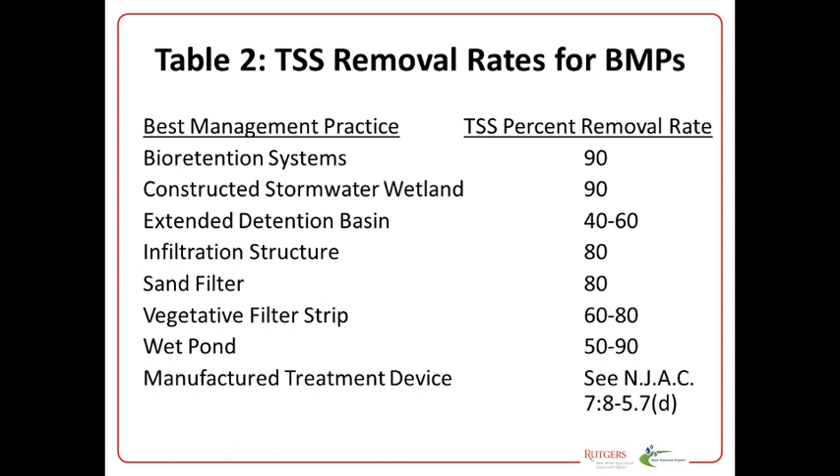The bottom one is these pre-manufactured treatment devices, which vary in removal rates, and I'll show you what some of those are. There are two types of systems.

One, on the right-hand side, is called a hydrodynamic separator, also known as the swirly device. Water comes in, swirls around, sediment settles out in the middle, and clean water comes out. Those are rated to remove about 50% of the sediment. The one on the left is a filter system, like a Brita filter on your faucet, and that'll get about 80% sediment removal.

These systems have to be approved by New Jersey DEP. There's a system called New Jersey Corporation for Advanced Technology that reviews all the data on these and certifies them, and then DEP approves that certification. So there's a website where all these devices are listed.

If somebody comes to you and says, 'I'm using the jellyfish, it gets 80% removal' - well, the jellyfish needs to be one of the systems that is on that website, approved. You cannot allow a system to go in that has not been approved by New Jersey DEP.

These systems are often sold by people very similar to used car salesmen - they review well. 'You buy my system, it's going to remove 90% of all pollution, it's going to be great.' So that becomes another thing to watch for.

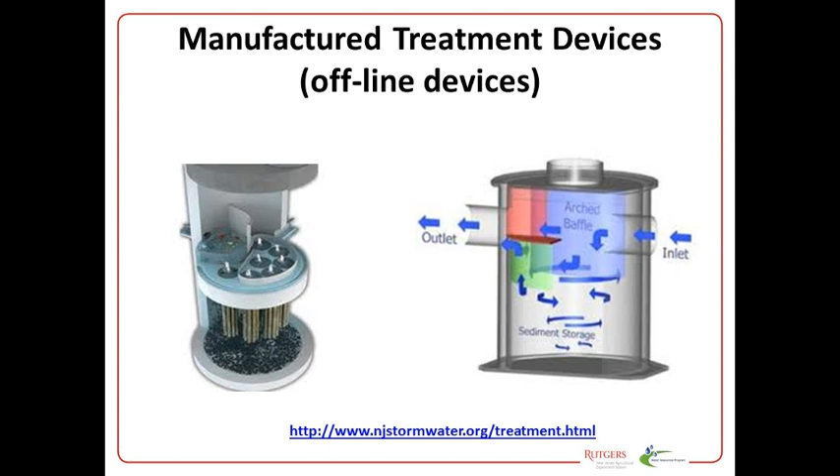So there's some general stormwater runoff calculations that we look at. Has the applicant demonstrated that pre-construction conditions have been unchanged for the last 5 years?

This is really interesting because some people have taken a piece of land and changed it so that the pre-development conditions are more developed than they actually were beforehand, so they don't have to remove as much stormwater - because going to a more developed condition requires less stormwater management than going from a natural, wooded condition to a developed condition. New Jersey DEP has caught on to that, and put this requirement in.

If you don't know what the pre-development condition was, you're supposed to use the wooded land use under good hydrologic conditions, which is basically the worst case scenario for a developer, since that's the nicest, least stormwater runoff condition compared to his development, which would produce the most stormwater runoff.

Another thing people used to do is take impervious surfaces and pervious surfaces - grass area and paved area - and blend them together and model them as one system, which was completely ineffective. What would happen is you'd get an inch of rain on that system and nothing would run off, whereas in reality, an inch of rain on the pavement would all run off, and an inch of rain on the grass would produce nothing running off.

So you're missing that amount of runoff. So you really need to model them separately.

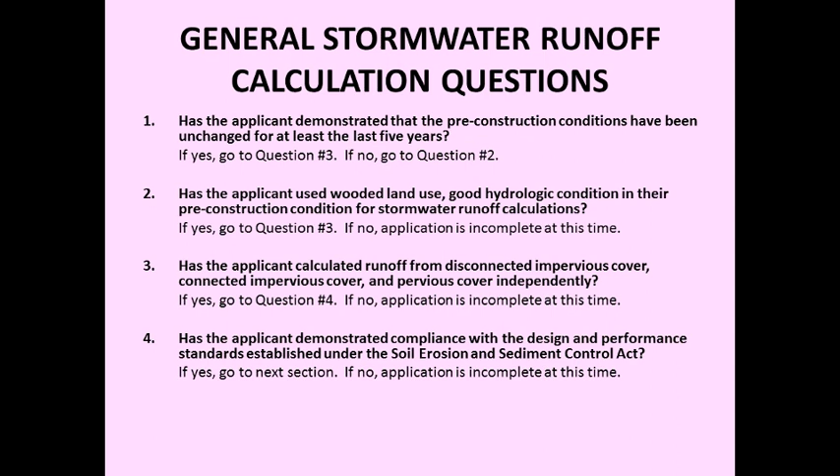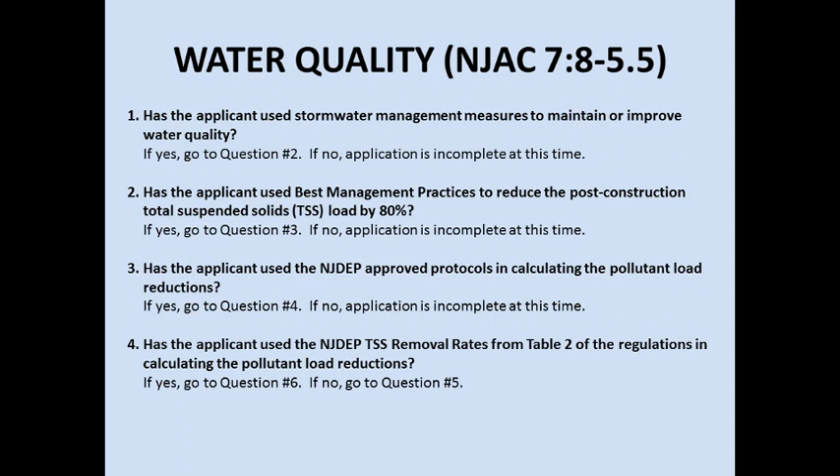So, water quality. These questions are simple. Are you removing 80% of total suspended solids? Are you using a protocol or system approved by New Jersey DEP, one that's in that table? Are you designing it in accordance with the Stormwater Best Management Practice Manual? That becomes very important.

If you're not using a DEP-approved system and instead using your own, have you provided enough information to show it also removes 80% of total suspended solids? Rarely does somebody come in with a development and say, I've got my own brand new stormwater system, I'm not going to use what's recommended by DEP. I've never seen that in my life, but there are opportunities in here to do that.

Number 7 is interesting: minimum depth between seasonal high water table, infiltration rates, and a 72-hour drain time. The infiltration rate has to be at least a half inch per hour. That's very important. You have to have a depth of 1 to 2 feet above the seasonal high water table for your system to function, and it has to be shown to drain within 72 hours, since that's when mosquitoes start to breed. There's also soil testing criteria in the Best Management Practice Manual.

One thing we see a lot is people designing an infiltration basin that's going to be 4 feet deep, yet they do the soil testing near the surface. One foot below the surface, the infiltration rate looks great. But if they tested at 4 feet, they'd realize it's all clay and not infiltrating at all—yet they designed it as if it had that surface infiltration rate. So you have to be very careful about that. Hopefully your municipal engineer will follow that and catch it, but this is a question you can ask them: have they followed the soil testing criteria in siting, sizing, and designing their stormwater practice?

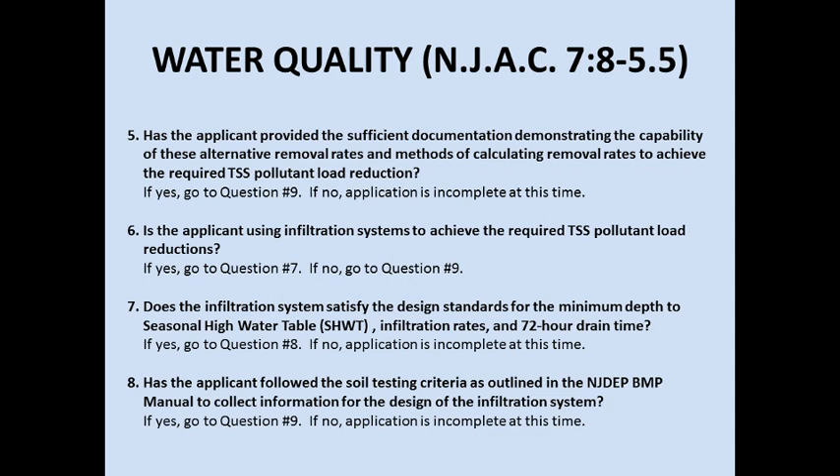Pre-manufactured treatment devices—do they meet the requirement? Are they DEP approved? Are they online or offline devices, meaning does the entire flow go through the system? That's a problem, because if you have the 100-year storm flowing through a system that can only handle the first inch of rain, it's going to flush all that sediment out. So you have to be very careful about those things.

There's also some stuff in here about special water resource protection areas. Certain parts of the state have these special areas, and you have to have those delineated and make sure you're in compliance with those regulations.

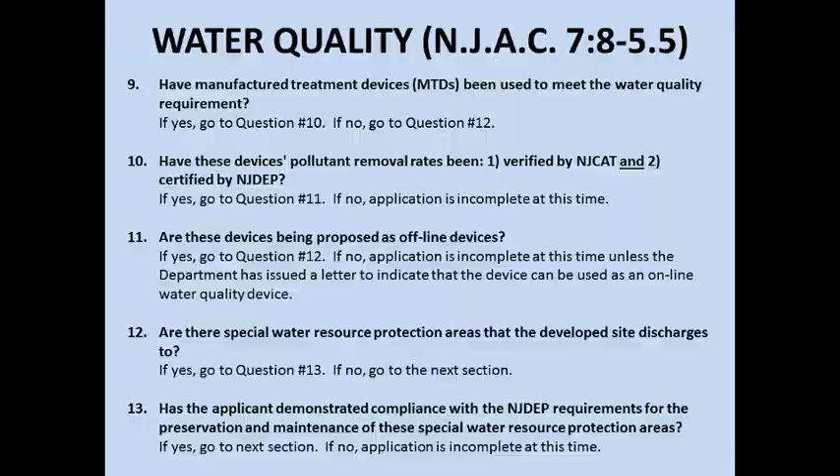Groundwater recharge requirement—now this is interesting. There's a spreadsheet created by the New Jersey Geological Survey called the GSR 32 spreadsheet. Every major development must complete it and turn it in to show the groundwater recharge before development and after development. Even if someone says the entire site is clay with no groundwater recharge, I would still ask for this spreadsheet, so I have it for my files to justify that. It protects you later on from New Jersey DEP. So that's something to think about.

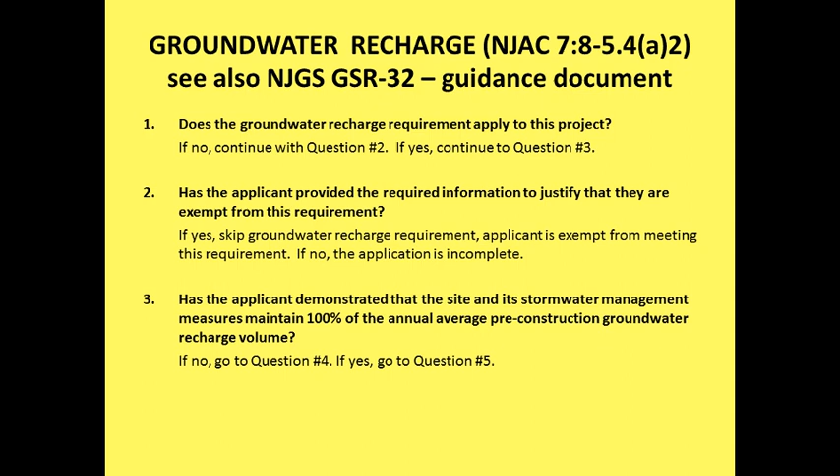These talk about maintaining 100% annual average groundwater recharge, or the recharge difference between the 2-year storm pre- and post-development.

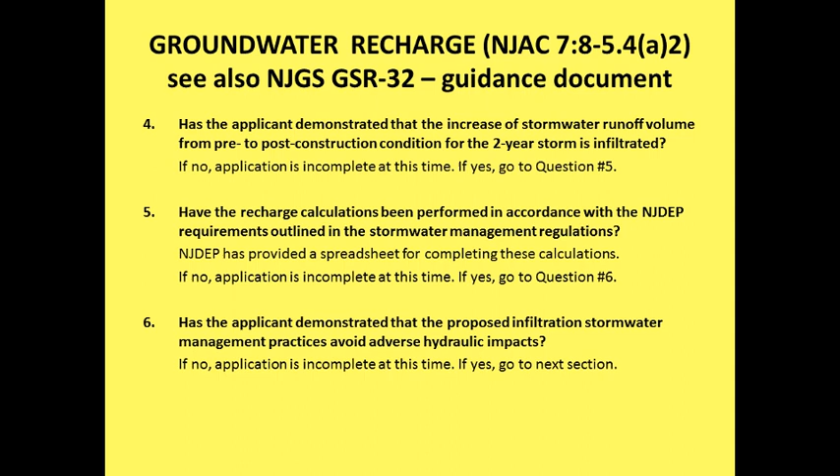It also talks about whether you've avoided adverse hydraulic impacts. In other words, if you're infiltrating in an area and water builds up underneath that infiltration system, is it going to leak into a basement or come out of a side of a roadway? Is it going to have a problem? Where's that mound of water underneath your system going to go? That's what number 6 really pertains to in this questionnaire.

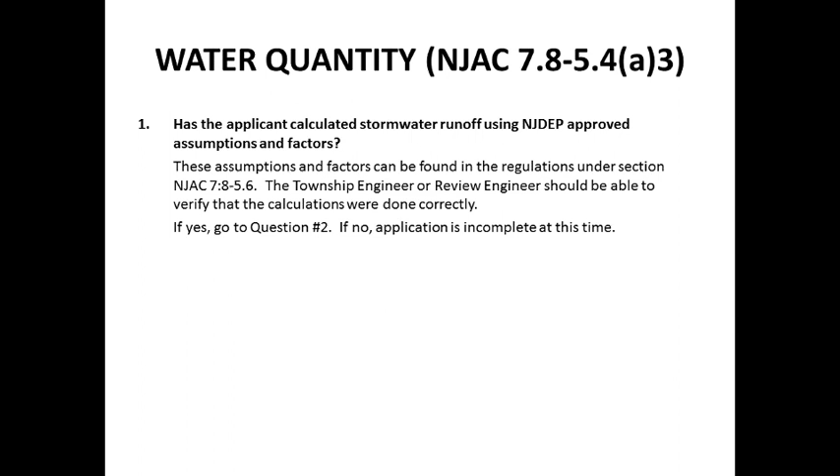The last piece of this is designing to meet stormwater peak runoff rates. These are the requirements that we have, and they're pretty straightforward. Every engineer who's done any of this work in New Jersey understands this—they've been doing this since the late 1980s, so they kind of understand how to do this. Like I said, there's a bunch of different requirements, and C is the one that everybody uses.

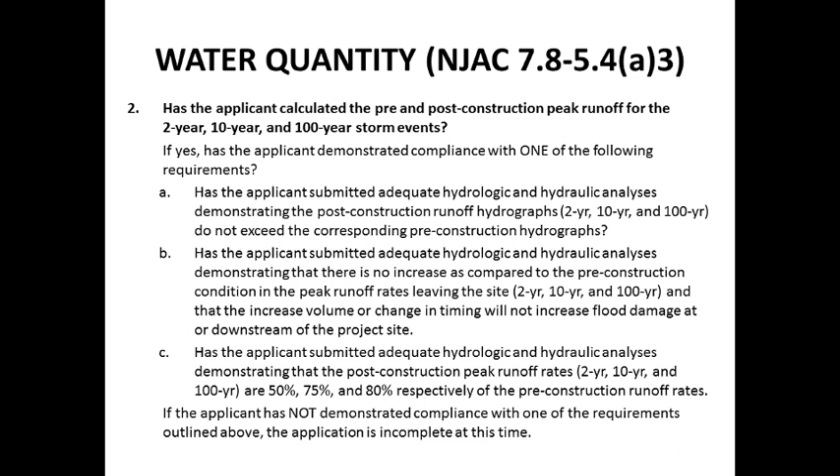Has the applicant submitted a hydrologic or hydraulic analysis demonstrating the post-construction peak rates for the 2, 10, and 100-year storm are 50, 75, or 80% of the pre-construction rate? For the 100-year storm, that doesn't mean you have to reduce the peak by 80%—it means you have to reduce the peak to 80%. So if the peak was 1,000 cubic feet per second, then it has to be 800 after your development. So it's reducing it really by 20% down to that 80% level. People get a little confused with that at times.

Then there's these things in here about structural maintenance, which is kind of weird because as engineers we really worry about safety and structural stuff to begin with—it's part of our code of ethics.

Number 1 is very important: we don't have a diameter outfall less than 2.5 inches, because that's the size of a red Solo cup and it can clog the outfall. I'm not really sure if the red Solo cup was taken into consideration, but often when we see an outfall clogged, that's what's causing it. So we think about things that are going to clog the outfall, and that's why we have that opening at least 2.5 inches in size.

Make sure you have a maintenance plan—it's very important. The maintenance plan should have in it the task, schedule, cost estimates, and contact information of the responsible party who's going to take care of it. If maintenance is required by another entity, then a copy of the agreement must be included in the application. You cannot build a detention basin or any kind of stormwater system on somebody's property and make them maintain it. You used to have detention basins on people's property, and then people buy that property and say, look, I got this great open space—and now they're required to maintain it.

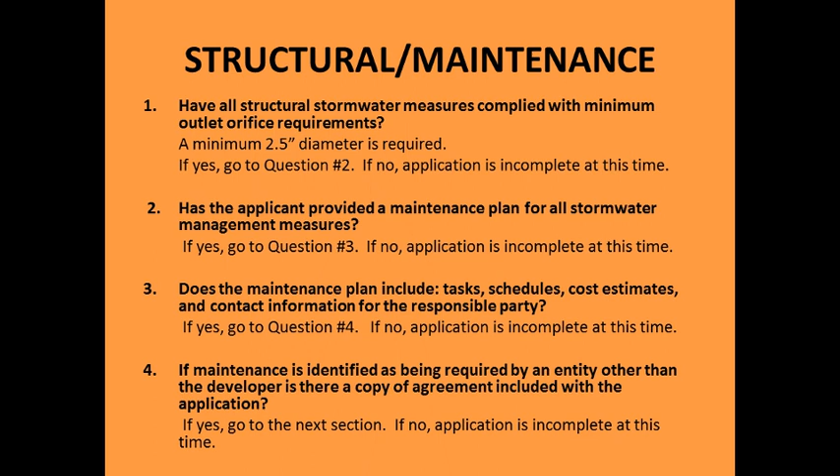So we try to avoid that.

Safety is another issue—talking about having trash racks so people don't get sucked into pipes. I'll never forget, there used to be a show on ER with George Clooney, one of the doctors. I was watching it on the couch with my wife, and this kid had fallen into the stormwater system and was trapped, and George Clooney had to jump in and save him. My wife's on the edge of the couch going, oh my God, he's going to save this kid. And all I kept thinking was, who's the idiot who designed that? There's no trash rack. Somebody should use their professional engineering license—this is just wrong.

These regulations seem a little redundant to me because we are required to do this ethically, but it doesn't hurt to check this and make sure it's in compliance.

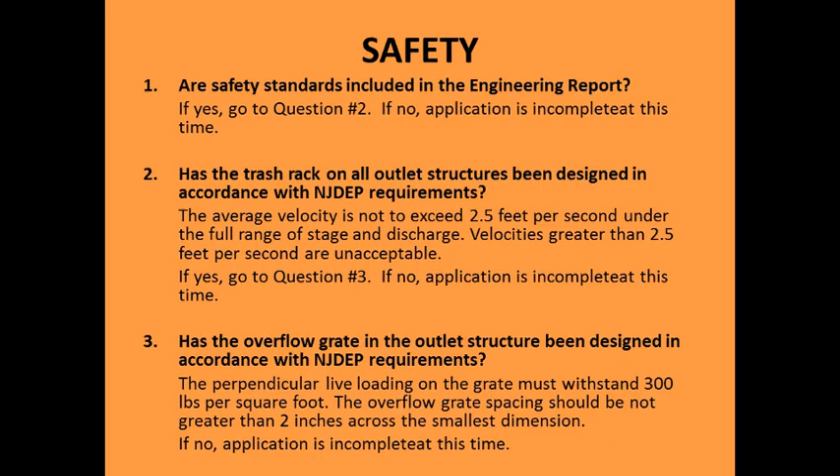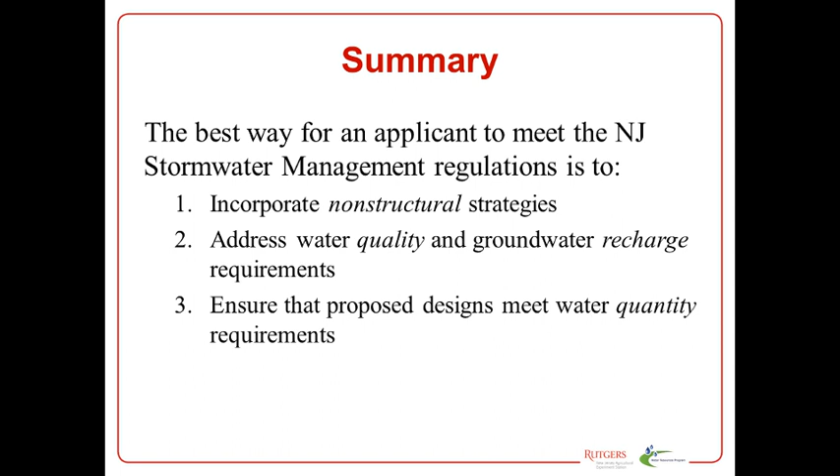So in the end, the best way to comply is: first incorporate the non-structural strategies, address water quality and groundwater recharge, and then design for the water quantity criteria.

So in the end, you're the only one who can approve these regulations, you as a township official. It cannot be approved by the state. So those are some of the things that we have for you today.

What we've seen is we've had these questions posted on our website as individual pages, and you can print those out and use them as part of the review process. We've had members of planning boards ask select questions that they see often are not complied with, like the deed restriction aspects or the maintenance plan aspects. Making sure you understand the questions and making sure the developer has the answers, and that it goes on record, is very important, so you can protect yourself and your municipality's liability. In the end, at the end of the year, there's somebody in your town who's a stormwater coordinator.

That person has to fill out a sheet at the end of the year saying they've complied with all the MS4 permitting rules. One of the rules is that all the developments approved satisfy those stormwater management criteria. So someone signing that, authorizing it, if the state comes back and finds out that's not true, not only is the town liable, but the individual person who signed it is also liable.